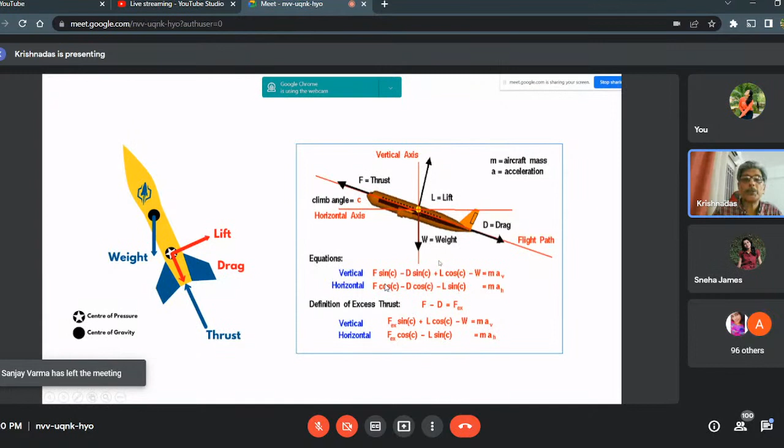You can forget about the discussion about the equations, what is lift here. You can forget about that.

Now, as far as a free body is concerned, it has got things like this - a center of gravity, and about the center of gravity, the vehicle is rotating. And when the vehicle is rotating, it has got a lateral acceleration which is generating a rectangular force like this. If it is a uniform body. If it's not uniform, it's not going to be a rectangular distribution - it will be varying to that extent.

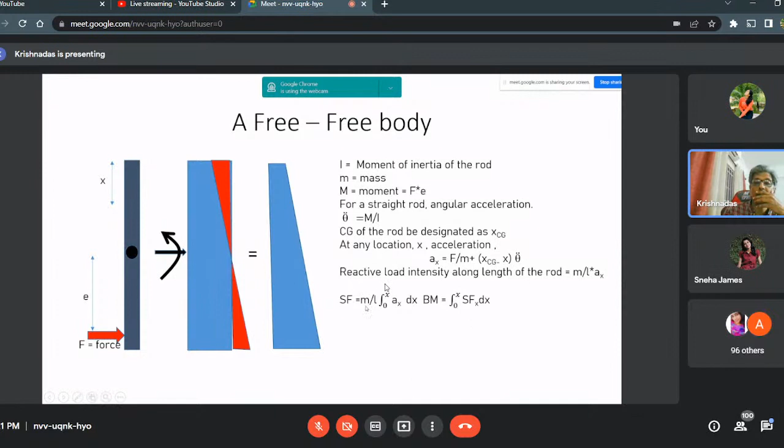And then if it is a rotating body, there will be an angular acceleration which will be giving a tapering acceleration along the length, and accordingly for a uniform body, the lateral force due to the accelerations, both rotational and lateral acceleration, will be a uniformly varying force along the length. This won't be true for a rocket because it is having a non-uniform distribution of mass. And forget about this equation - it is nothing but the integration of the total forces along the length.

Now, the real thing happening for a vehicle is not very simple because it is having a varying geometry as well as varying mass. Accordingly, the forces, both aerodynamic and inertial forces, will be varying, and accordingly the bending moment distribution will be something like this, and shear force distribution will be something similar to this.

One thing I just wanted to tell you is the disturbances due to the aerodynamics will be controlled by a lateral force which is called the control force, so that the vehicle will be kept in equilibrium. See, if there is a lateral force in an unstable vehicle, the vehicle can rotate because of the lateral force and it can break. This kind of breaking has only happened in some of the failed vehicles like ASLV and GSLV. A few of our flights failed because of the lack of control force or no control force condition.

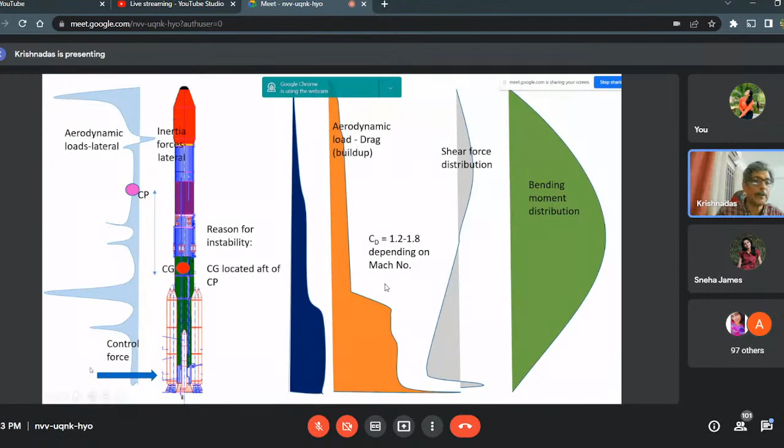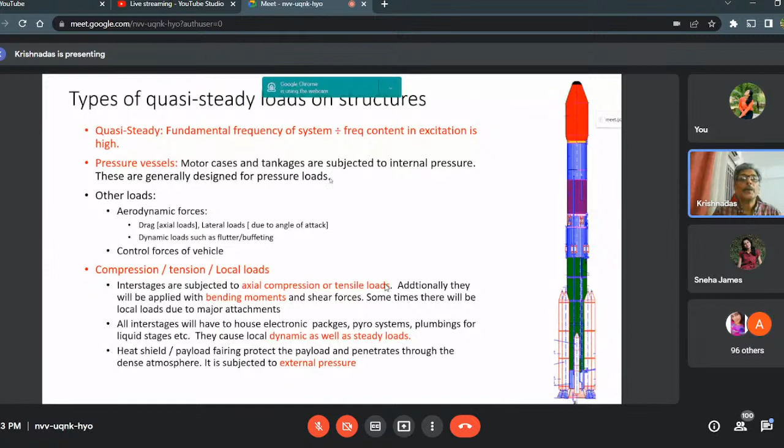So control force is very vital, and this is a life saver for us, control force. Again, this is a problem. Okay. Now, these are the...

Quasi-steady loads - what is quasi-steady? It's the fundamental frequency of the system and the frequency of the excitation. If this ratio is high, it is called quasi-steady. These definitions you will see anywhere. So if the frequency of the system is too high and the excitation is at a very low frequency, you say that the excitation is very steady.

In pressure vessels, motor cases and tankages are subjected to pressure. As I told earlier, compression, tension, and local loads will be happening. These things are very clear. That means when there is acceleration in the forward body, for example, when the thrust is developed by the motor case, the forward body will be subjected to axial compression and the rear body will be in tension along with the pressure inside the chamber.

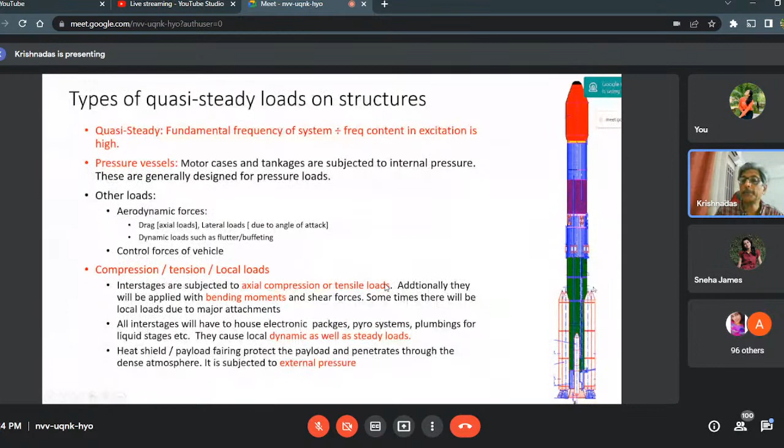Aeroelasticity - you can just note this particular phrase. It's a Collin's triangle. Aerodynamic forces, elastic forces, and inertial forces interact to form the aeroelasticity conditions - static and dynamic aeroelasticity conditions. Then flight mechanics is defined between the aerodynamic and inertial forces, and structural dynamics is defined between the elastic and inertial forces. These details you will see in textbooks. It's very interesting - please note this phrase, Collin's triangle. On the internet, these things will be available.

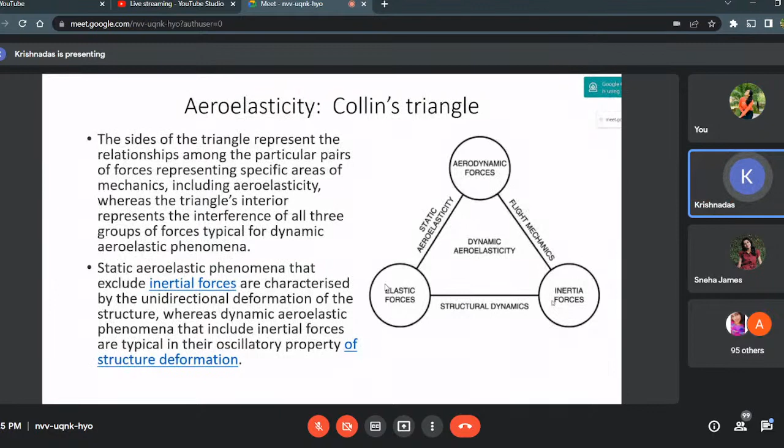So basically, a structure is subjected to these forces. Just go through this diagram. This is very important for later sessions.

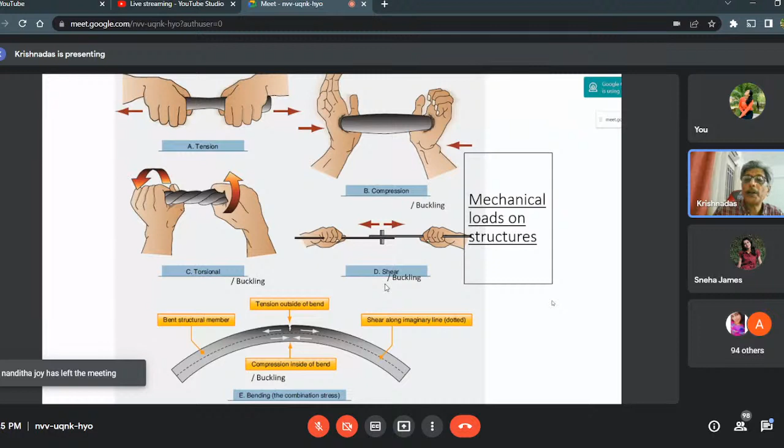Tension, compression, torsion, shear, and flexure - okay, bending, that means flexure. These are the basic forces acting on a structural member.

There are two types of designs in structure - one is strength-based, other one is stiffness-based. Strength means it has to withstand the loads - that is called strength-based design. Stiffness means it has to meet some minimum frequency or minimum buckling margin - these are stiffness-based designs. Fundamentally, pressure vessels are strength-based designs, but there are cases where it has to have some minimum stiffness conditions also.

Stiffness-based designs are something like a spacecraft adapter. Spacecraft should not be subjected to a frequency less than some hertz. In that condition, you have to see that the payload adapter is fairly stiff.

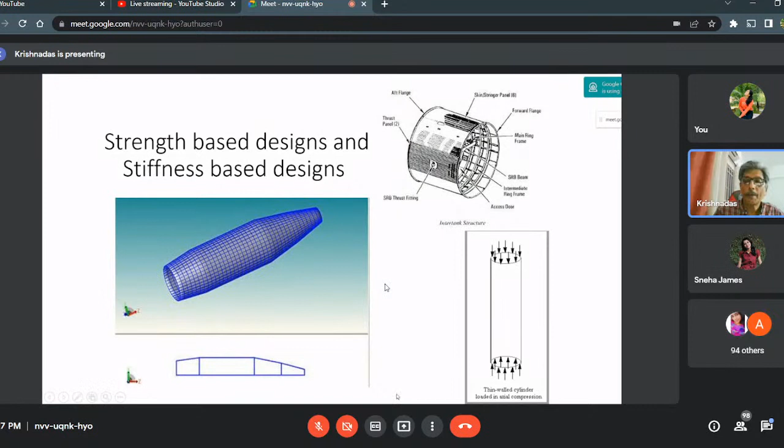These are the material options we have. Can I just go through this? Maraging steel - M250 grade maraging steel, it is called, the first one. It's a very costly steel. It has got a proof strength of 1750 MPa, which is more than 4 times the strength of structural steel that we use in our civil construction.

These two terms, specific strength and specific stiffness, are very important in structural engineering. You will see that among metals, maraging steel is faring the best, 231 with respect to specific strength. Titanium is very close to it - this is an alloy, not pure titanium. 6% aluminum and 4% vanadium are added to titanium to make this alloy. It is also equally good as maraging steel.

Aluminum alloy 2014 is a very versatile alloy we are using. That's also faring good. But you can see that this alloy is 4 to 5 times stronger than normal aluminum. 480 UTS is almost 5 times stronger as compared to pure aluminum.

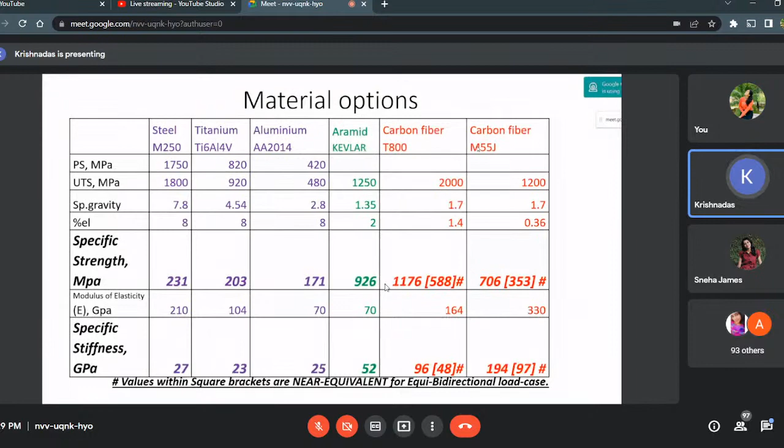But when you come to composite - these three are composite materials - you can see the difference with respect to specific strength and stiffness. They are faring much better than metals. So composites are very good proposals for large vehicles. This is again another way of telling about the advantage of these materials.

Just an exploded view of a typical launcher.

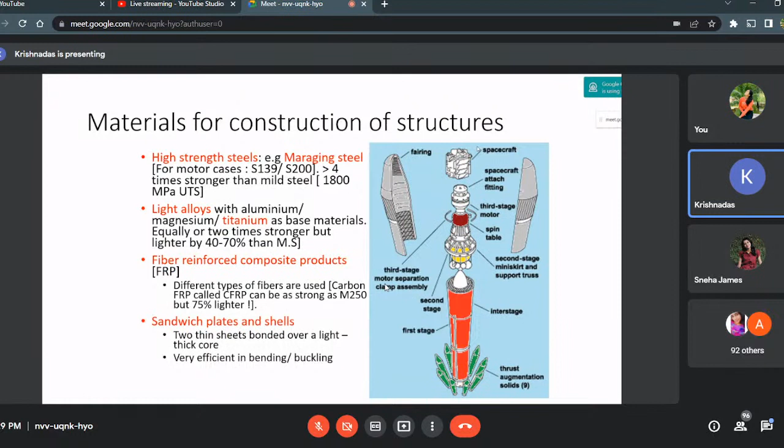Now this stress strain curve of a metal is something like this. This phrase also you please note down, Ramberg-Osgood relation. The shape of this particular stress strain curve is defined with this equation.

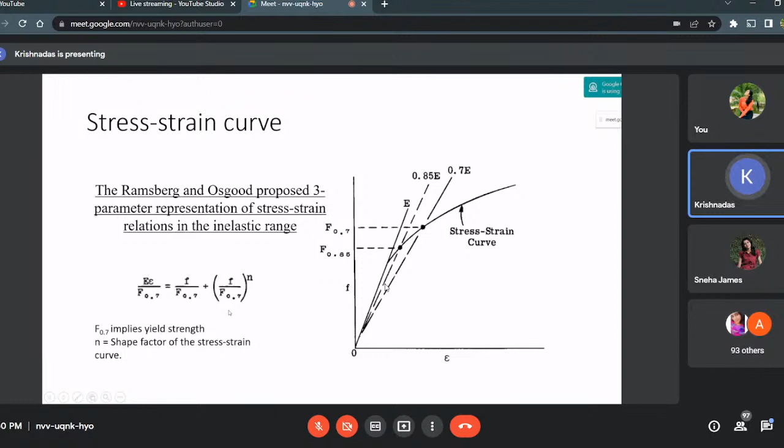So F.7 implies the yield strength of a material - it's a proof strength, we call it. It's the secant lines at 85% of E and 70% of E, the Young's modulus, where they cut the real stress strain curve. These points are defining the F.7 and F.85. With this, the Ramberg-Osgood relation is worked out in this fashion. So N is the shape factor for this curve.

So this is the construction of such a structure.

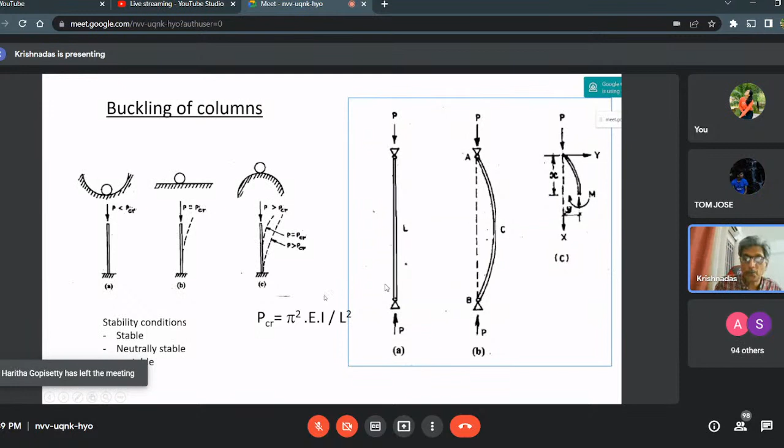Now what is buckling? This you have already learned in your BTech earlier semesters. Buckling is an instability. Depending on the end conditions, the critical factor will vary. Actually, pi squared EI by L square is for a both sides hinged construction, but a K factor will come depending on the end condition. K will be 0.25 for a cantilever, and if both sides are fixed, it will be 4, something like that. So there is a condition.

As far as a flat plate is concerned, it's like this. If only 2 sides are supported, it will buckle something like this. But when 3 sides are supported, the buckling mode will be something like this, because these 2 sides cannot buckle. They are simply supported, so they will not buckle. The free end will buckle. So the Kc value will vary accordingly.

This formula is very similar to the formula for a beam. Only difference is that 1 minus nu square term is coming because of the width of the plate. So the Poisson effect is coming here. And T by B, the whole square divided by 12, is nothing but that L by rho condition, or rho by L condition, I would say.

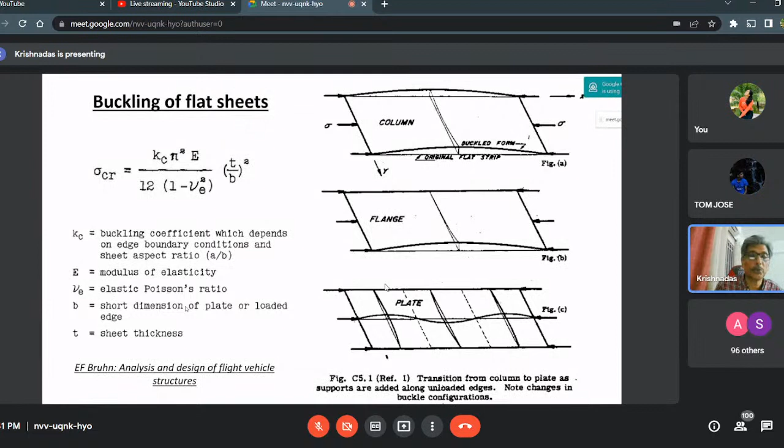And these factors, please go through this E.F. Bruhn, Analysis and Design of Flight Vehicle Structures. Please note down this, it's a very important book. If somebody is interested, please refer this. Very informative, a book which was written long back, around the 1960s. But it is still fundamental even now, because fundamentals of our science don't change, starting from Newton's period. So E.F. Bruhn, Analysis and Design of Flight Vehicle Structures, is very important. Please note down this particular reference. It is available on the internet.

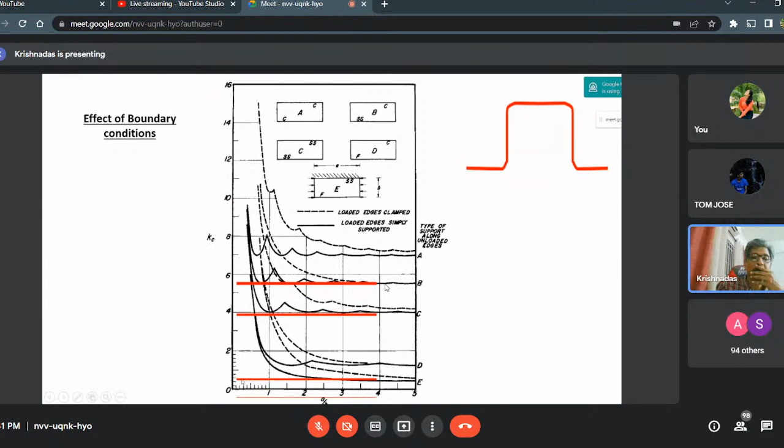And different end conditions of this particular plate are clear here. You will see that depending on the end condition, there are different values for Kc. Very, very low values, like 0.5 or 0.4, to 5.5 are coming. So the end conditions are very important.

This is a condition where a hat section is buckling, different parts of the hat section buckling. For example, this is a crown, you can consider this as a simply supported condition here. It will buckle like this. This will buckle like this. And after the rivet, you will see a free portion. It will buckle like a one-end-free condition, like what we have seen previously. So this is the condition of a free edge beyond the rivet.

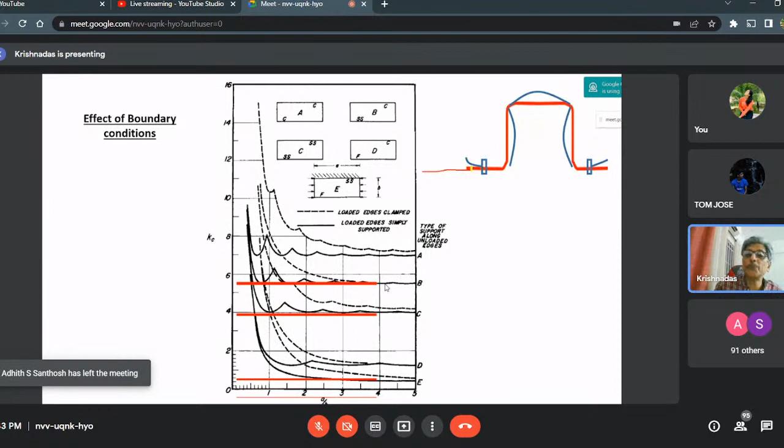So you can appreciate that when the rivet distance is far off, for example, if I'm giving a flange which is much longer than this, you can see it has no meaning. When you really see that, the flange doesn't serve any purpose, it will simply buckle within. So this is the condition where we are having a very limited length of this flange.

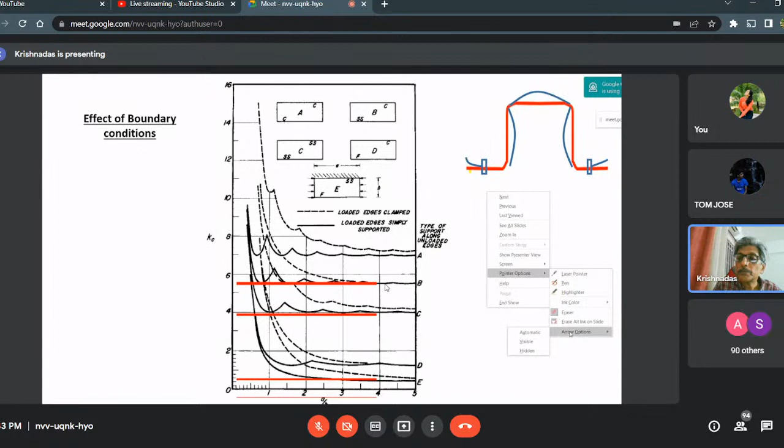Now, when we come to the next one, this is buckling under shear. So you see that the pattern is something like a parallelogram. It is going into a parallelogram or a rhombus condition.

And here, when we go for buckling under bending, how does bending cause buckling? You know that beyond the neutral plane, there is a compressive region. In that region alone it buckles. So when we have a very long web, for example in an I-section, the web is very long, it is likely to buckle even under very low stress. This is a dangerous condition for an I-section. Even though we say the I-section is very good in taking bending, the web also has to have good strength and stiffness. Otherwise, the I-section will fail because of the buckling of the web under bending.

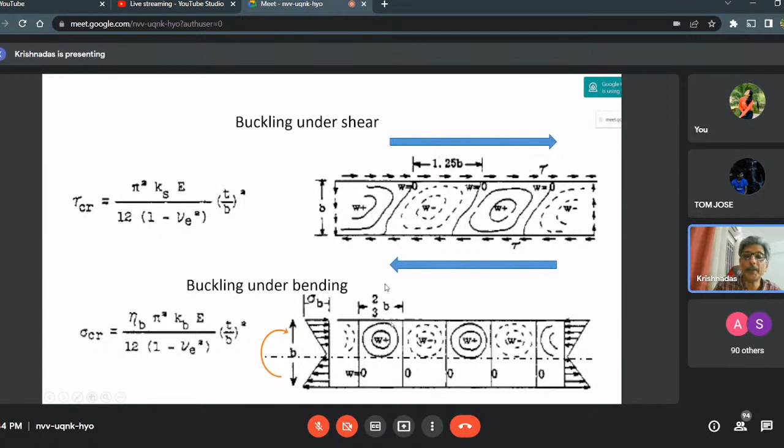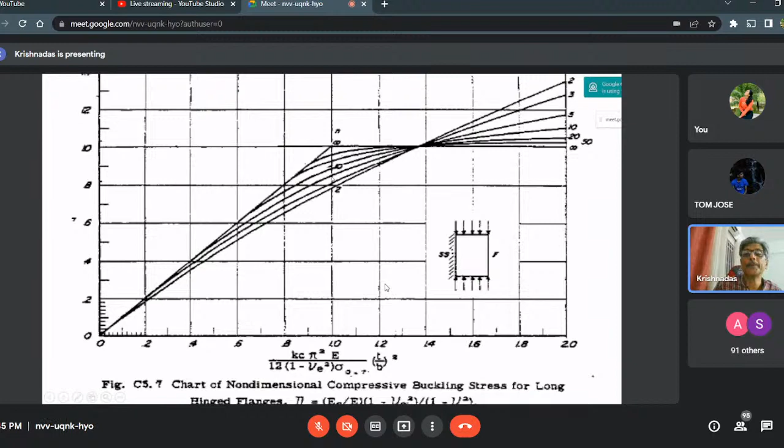Now here I am depicting a cross section where it is riveted. The shell is riveted to the end ring, and you are having a bending and shear force distribution. Around this end ring, there are regions where this bending is going to cause compression here and tension here. How that compression and tension really pass through this end ring is an interesting aspect. Where the compression is there, the compression is going to happen by butting these two flanges together. When the joint is in a region subjected to tension, for example this area, it is subjected to tension, the joint will open there.

What happens because of joint opening? The flanges will not be butting, so a portion of the load will go through the flange compression area. Even though the cylinder is uniform, the behavior of the joint is different at different orientations. Compression is passing close to the hub, whereas tension is happening with an eccentricity from the hub. These kinds of finer aspects we have to see.

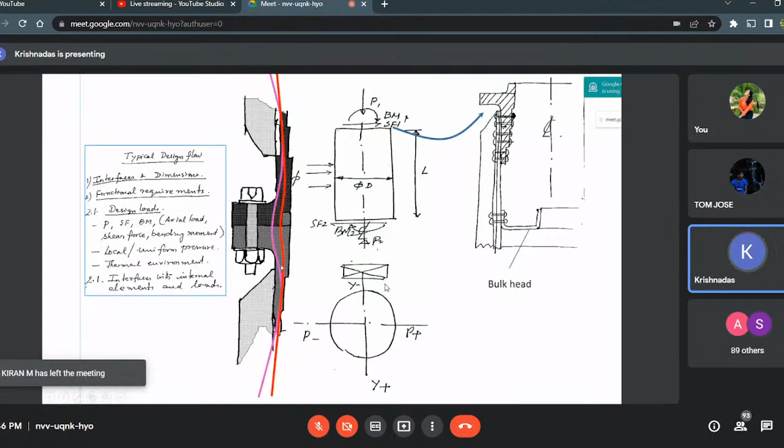Okay, leave all these points. I'm just telling about the hat section. A hat section has different members: crown, two webs and two flanges. The flanges are riveted, and there's a free edge region.

These aspects can be designed by varying W1, W2, W3, etc., to see that the hat section is properly designed. For example, if I make this W2 too high, you know it is going to buckle there, so you cannot make it too high. The thickness of the hat section is important, and the height H is important.

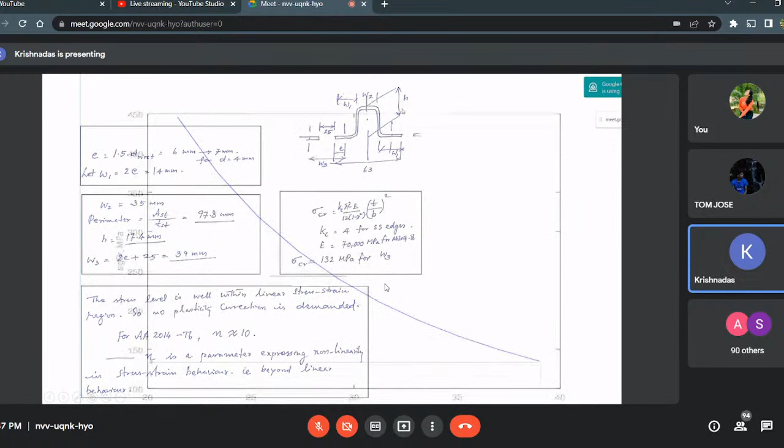So this basically tells what happens when the width W is increasing. Exponentially, the strength is going to come down, because that T by B, the whole square, whatever we have seen earlier, is making the section weak when the width is increasing.

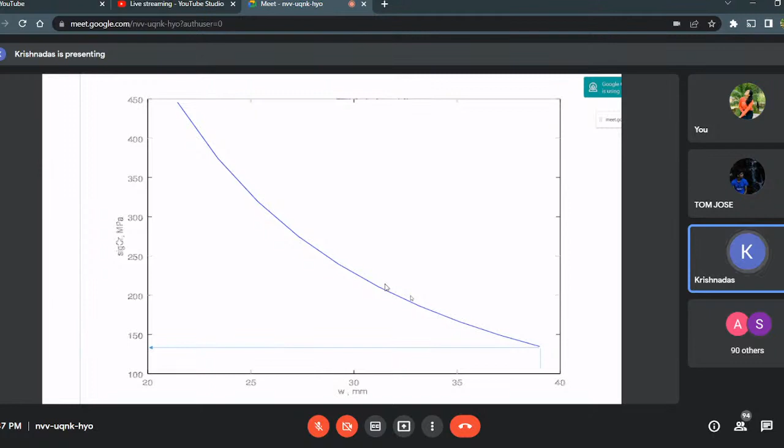Cladding correction for aluminum alloy. Cladding is given to see that the surface is protected, because pure aluminum is good in resisting environmental attacks. So cladding is given.

But what is the effect of this cladding? The overall thickness of the sheet, which is used to form the hat section, becomes structurally weak because of the cladding, because cladding will yield faster than the core. Accordingly, there will be a small weakening of the section to the extent of the cladding thickness.

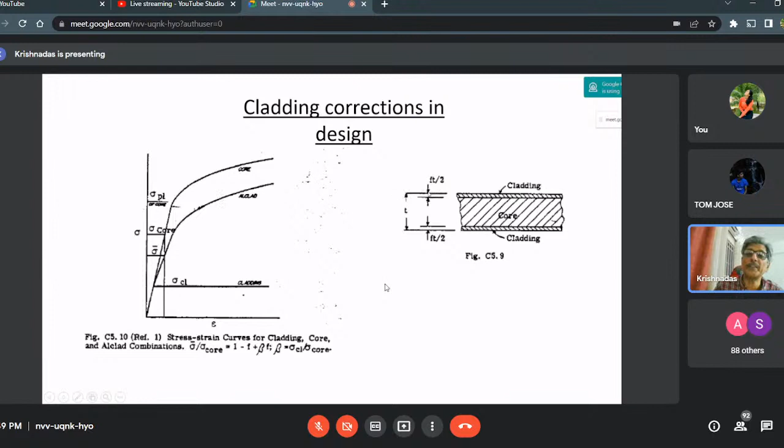There should be enough thickness. So when you build the thickness, you have to see what the cladding is there, and the thickness of cladding should be good enough for environmental resistance. But it should not make the section so weak also.

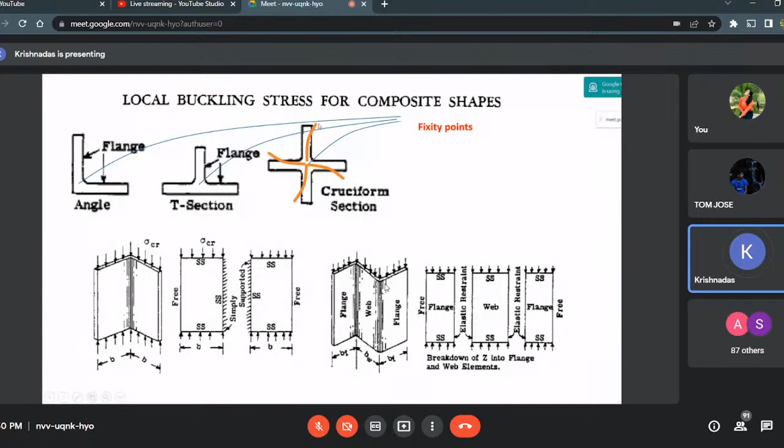So fixity points - these are all called fixity points. For example, in a cruciform, this is a fixity point. About that, it will start making the buckling mode shapes.

Again, these are all different sections. This hat section I have already told you. This is something like a Z section. This G section, etc., please see that particular Bruhn book - there all these things will be described.

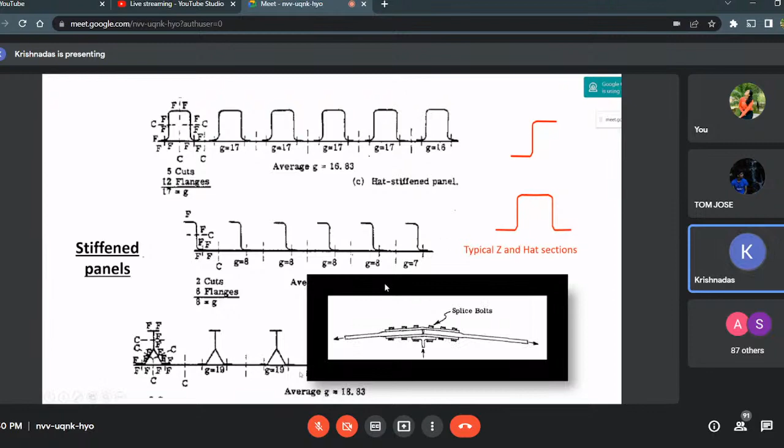Between two shells, there will be a double splicer along with a T section between them. This is the way a shell is buckling. So between bulkheads, it will start forming this kind of mode shapes.

I told you earlier, it is not a simply loaded condition, and in tension it will not have buckling, because tension is usually not an unstable condition. Stability condition doesn't normally arise on a tension member, but on a compression member it becomes unstable.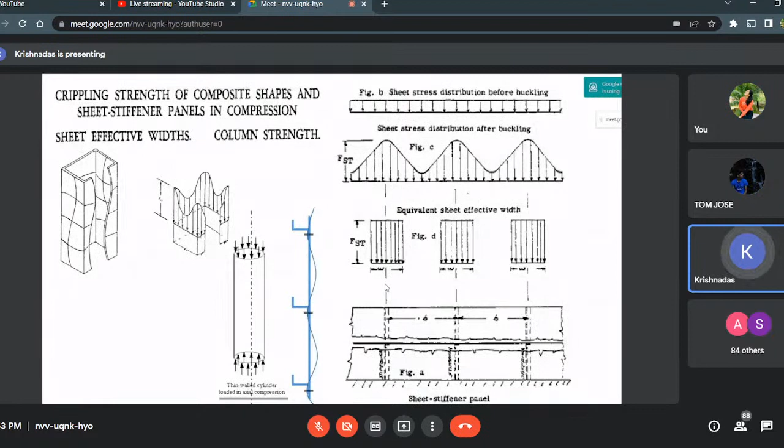So really, when you see the development of this particular section, it will be something like this, where you have the area where the corners are. That corner, as I told earlier, is a fixity point, and it will take much more compressive stress than locations away from the corner. That is very important, so we always have to have corrugations - you should have this kind of shape with rectangular bends onto the stiffeners.

Beyond a certain line, you see an effect of the yielding or strength conditions of the material. For example, take maraging steel and mild steel, having almost similar Young's modulus E value and Poisson's ratio. In such a condition, which one will buckle first? Under the Euler curve, you'll see it has no relation with respect to strength. It only depends on the E value and geometric values like L dash and rho. So an Euler beam of maraging steel and mild steel will buckle at the same load, theoretically.

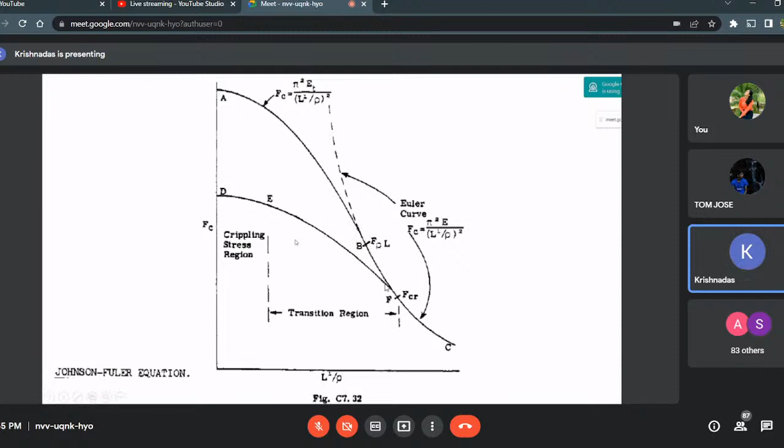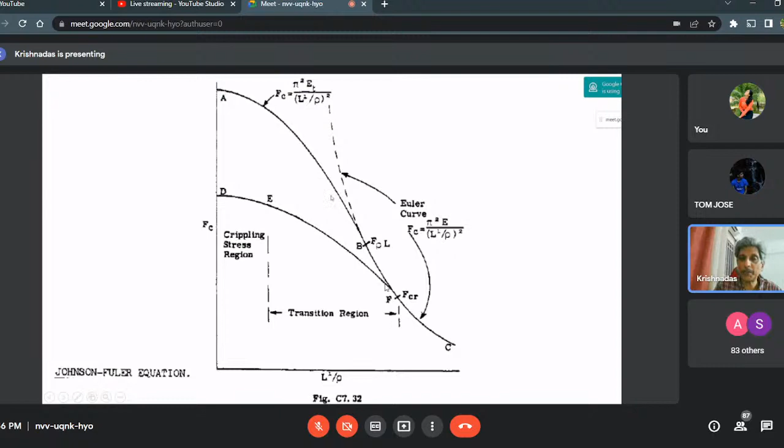There is an intermediate region between compressive failure and buckling failure, described by the Johnson-Euler equation. This covers conditions like FC and crippling, which occur when the failure stress is much more than, or closer to, the compressive strength of the material. You also have to redefine failure in this region, which moves away from the normal condition of the Euler curve. These are the different conditions of Johnson-Euler curves.

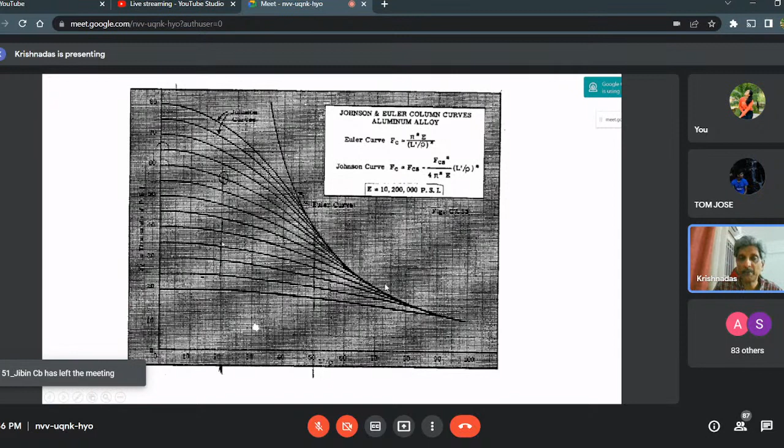This is also available in E.F. Bruhn's book. And non-uniform stiffening is what I was telling about. I'm sorry, I think I'm running out of time. It's already becoming 8, I'll go fast.

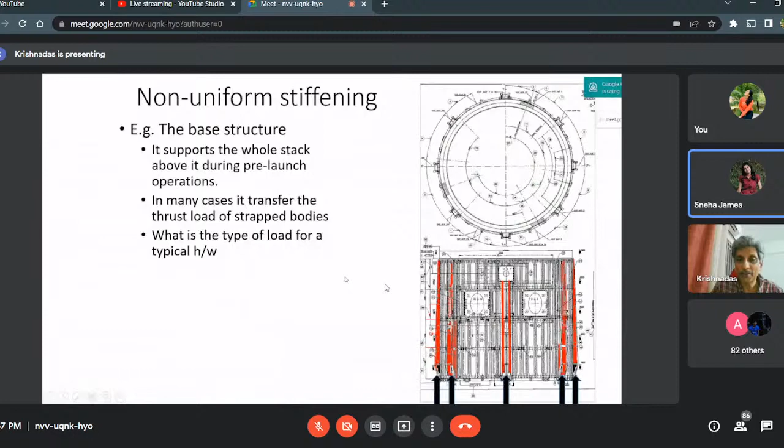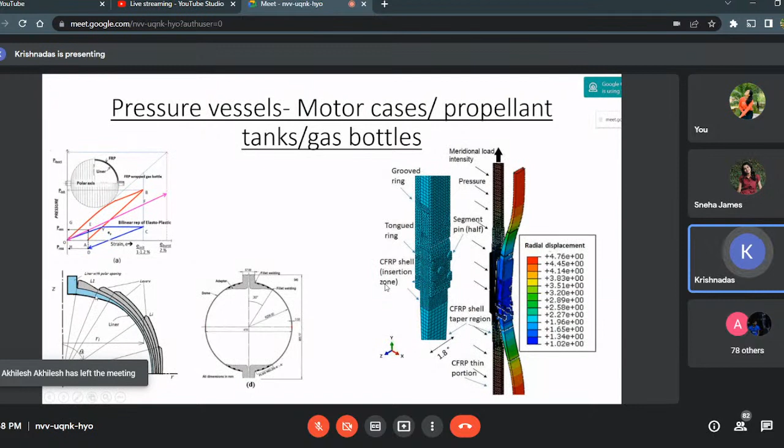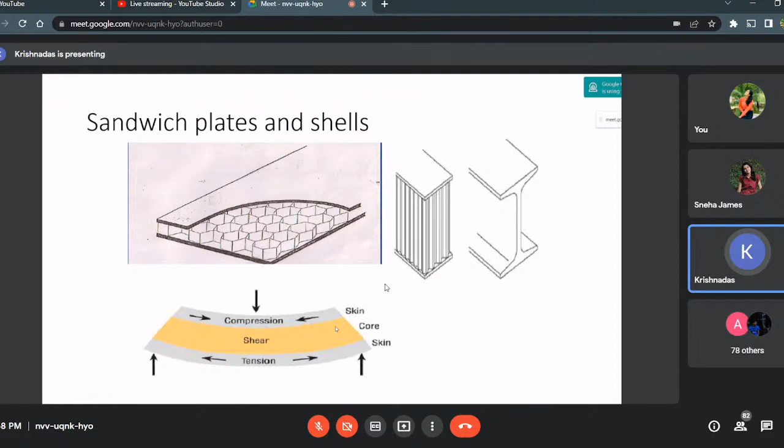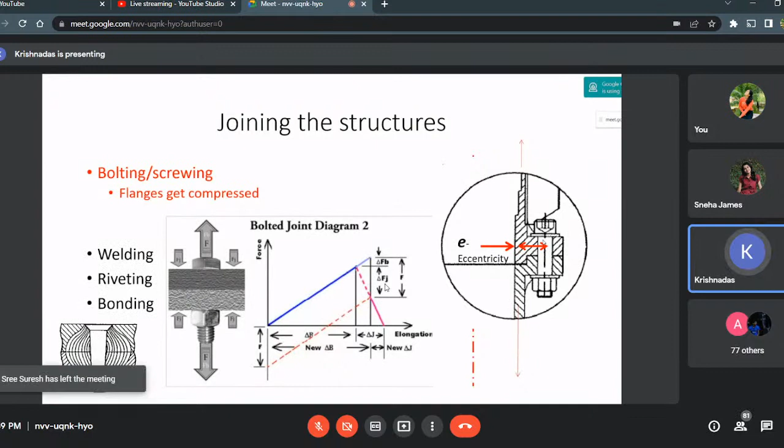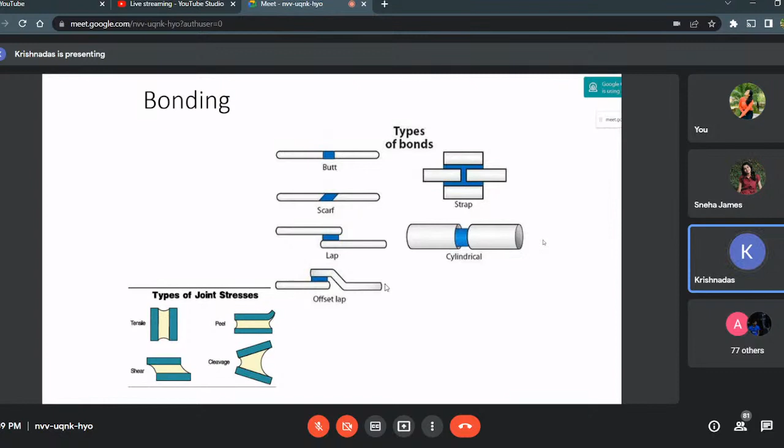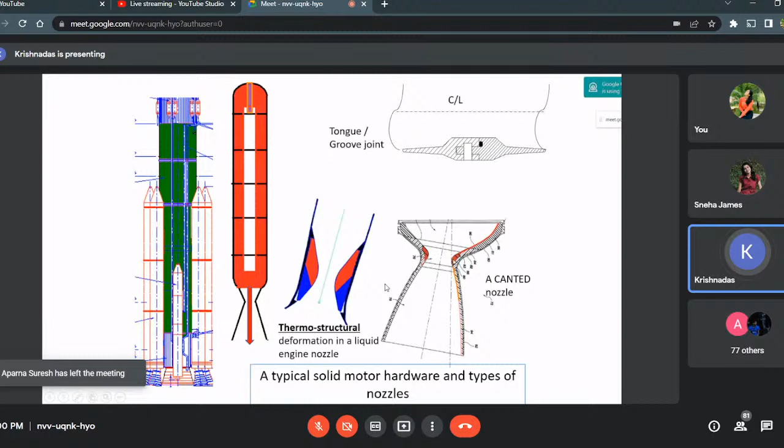Okay, these are welding, riveting, and bonding - different ways of joining different parts of a structure. Here is a segmented joint of a pressure vessel; pressure vessels are made in sections, and how you join them is very important, with certain principles defining the joint. When you have thermal contractions of the liners for a nozzle, these are subjected to very high temperatures, something like 3000 Kelvin. The temperature diffuses into the backup, so there should be a refractory or thermal protection system for the metals, because metal cannot withstand more than about 150 or 200 degrees centigrade.

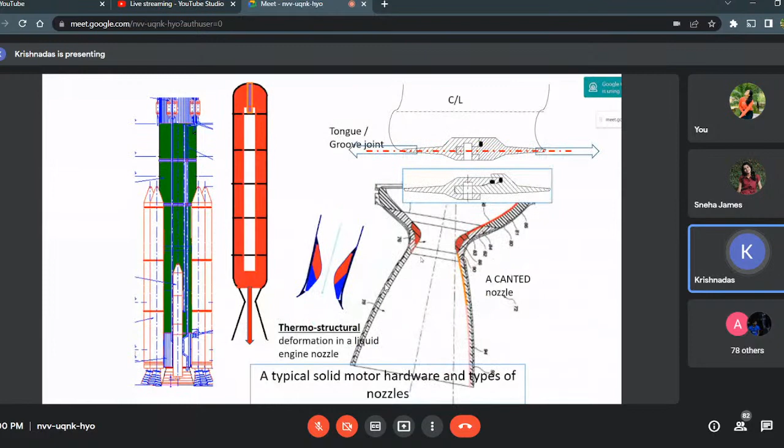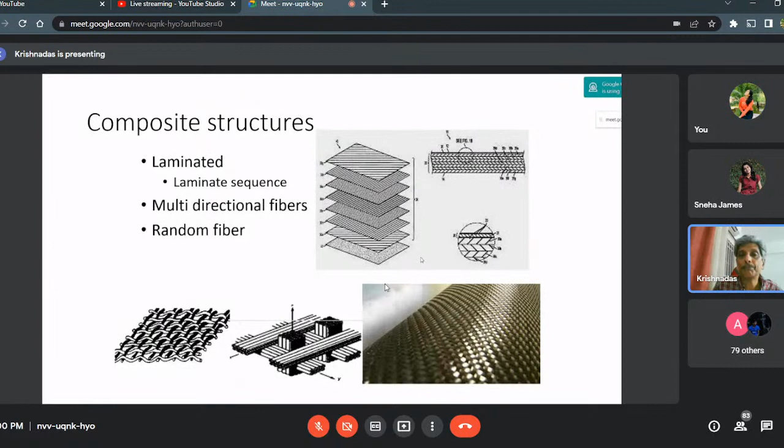Okay, I'll leave these kinds of explanations. These are all composite structures, or laminates, having different fiber orientations. You would have studied it. If you want details, I will come back in your question and answer session, or you can refer to the book Composite Structures by Johnson, which gives many details about composite structures.

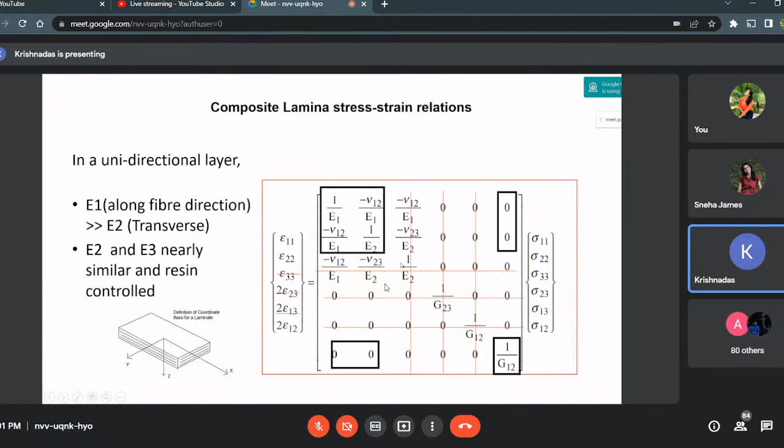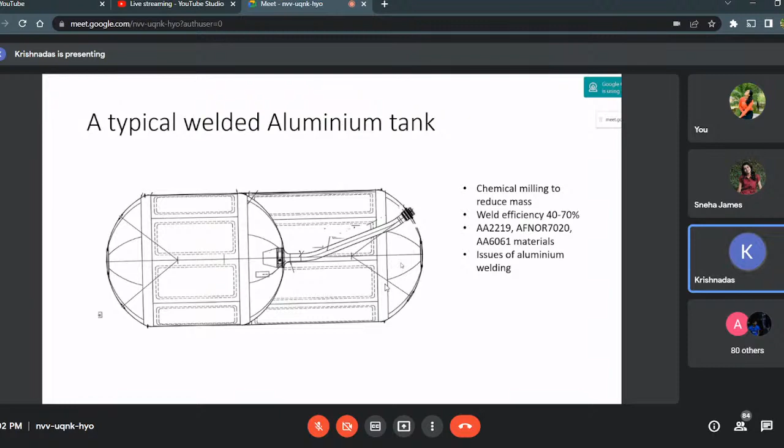Rocket structures normally have around 4 to 5% metallic mass, and another 4 to 5% thermal mass. So overall mass of a cryogenic tank may be somewhere around 10% inert mass. Unless you control that within some 10%, there will be a penalty for the launcher with respect to payload capability. Now this is a rocket structure.

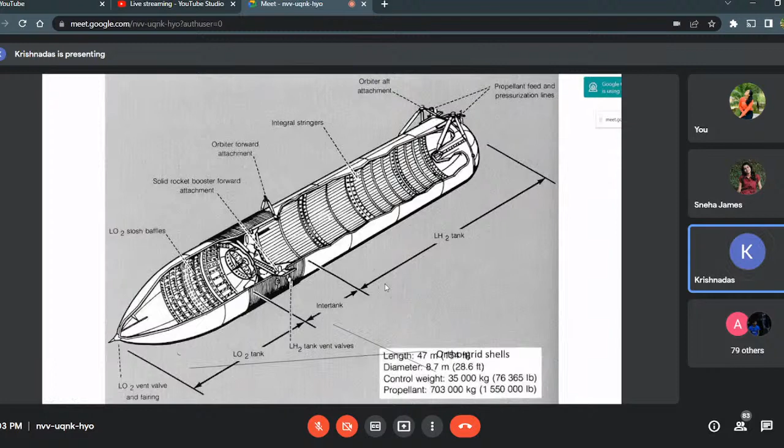Again, like our fuselage, it has bidirectional stiffeners. This is a fuel tank having a composite overwrap over a polyimide liner inside. So the overall mass of this tank may be... the mass may be the combined mass of these two boys who are doing this work. It may be only something like 200 kg.

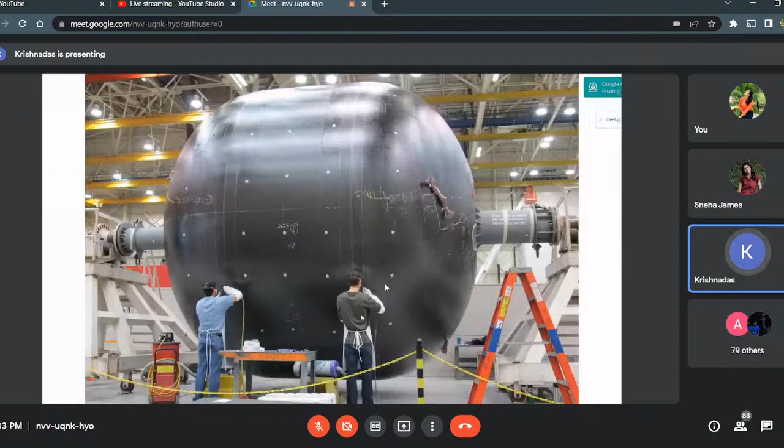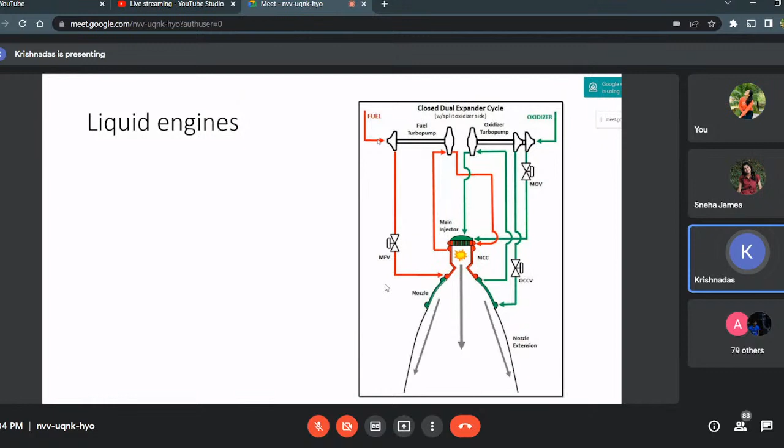Okay, this is a liquid engine, which I have not described about. There are complexities with respect to this. The turbine and pump of cryogenic engines work at around 44,000 or 45,000 RPM, whereas liquid engines work at around 6,000 RPM. For example, our second stage of PSLV, the horsepower of that particular turbo pump is nearly 2,500 HP, whereas the mass of that is maybe nearly 100 kg only. So 100 kg of engine is developing around 2,500 HP.

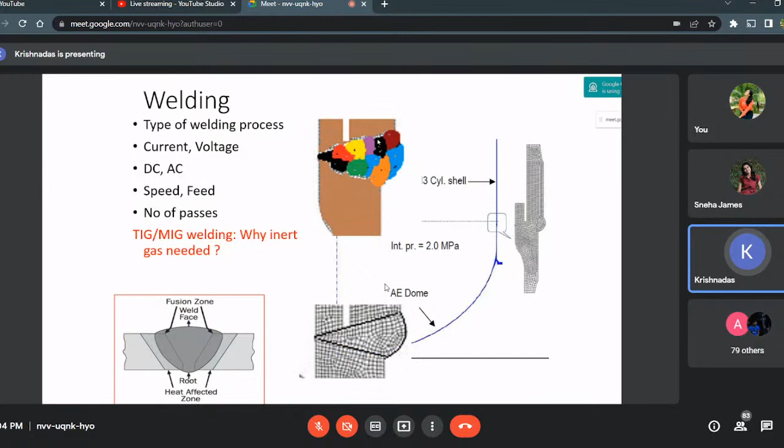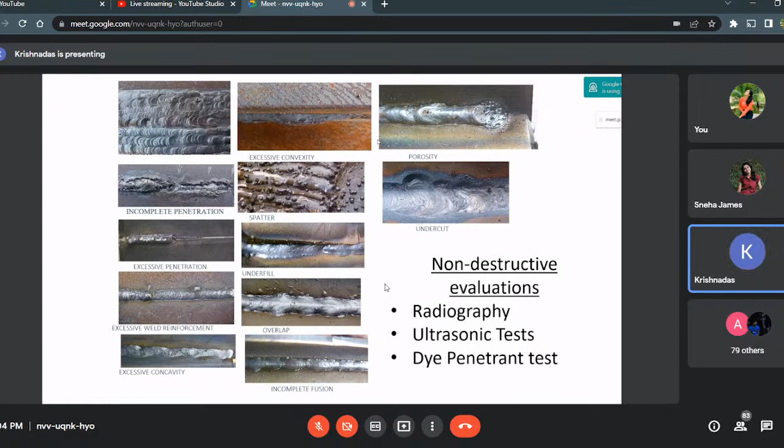This is welding. Welding has got a lot of versatility. That's a very important technique as far as our tankages and motor cases are concerned. Welding defects are very critical. We have to have non-destructive evaluations to qualify these welds.

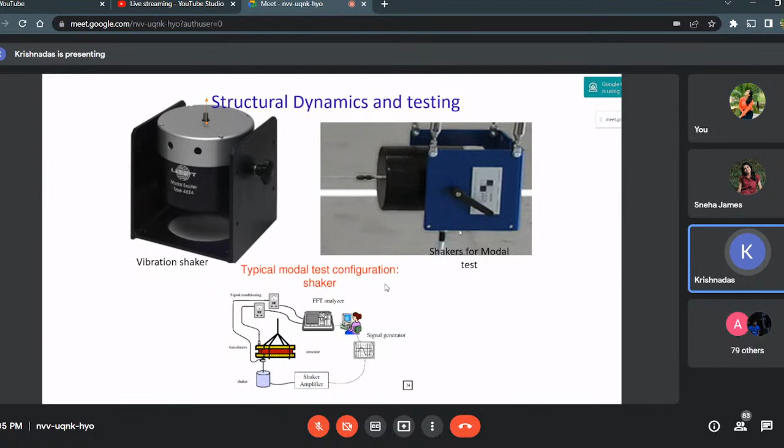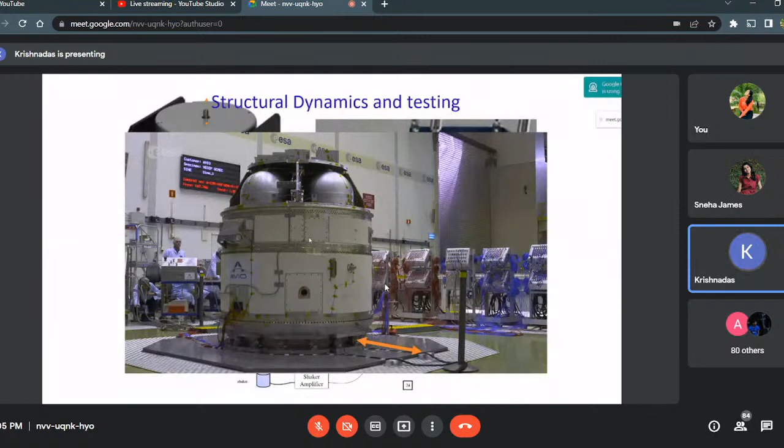Structural dynamics is a very important area as far as structural engineering is concerned. We have structural dynamic testing equipment. This is a vibration shaker for a stage, and the stage is undergoing vibration in this direction. This is called a slip table. The shaker goes from 20 Hertz to 2000 Hertz to see that different parts are vibrated, and if there is vibration loosening, that also will be addressed by this testing.

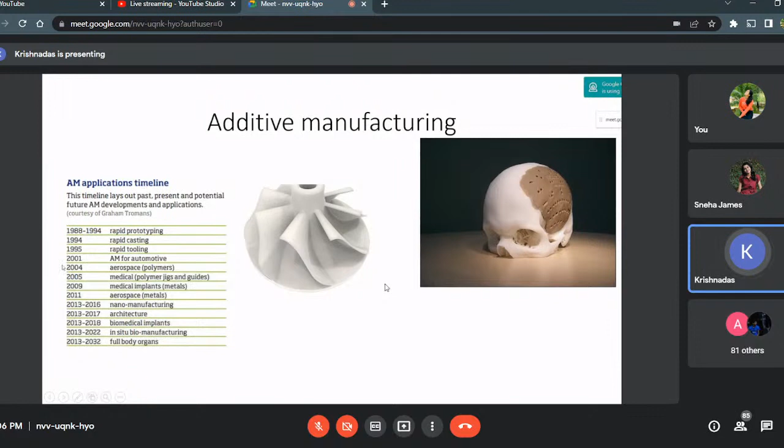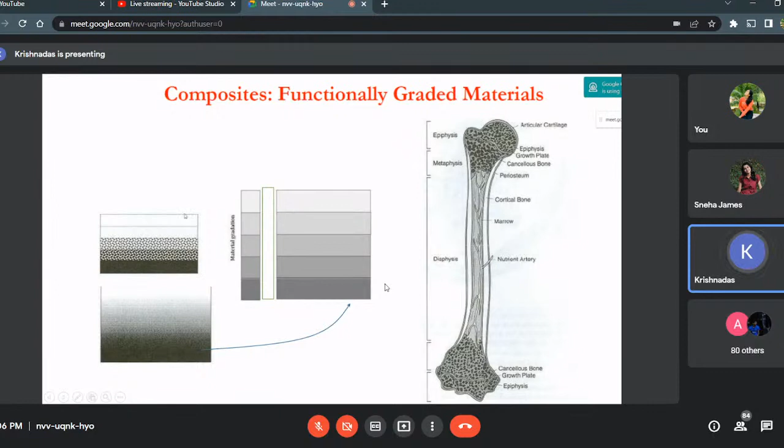I'll see it later. And the composites, there is a graded composite. It's a generic condition. The natural trend is something like this, a very uniformly graded thing is there in our bones, whereas we are trying to imitate it in discretely graded conditions. And quasi-static loads and vibratory loads, these are all important.

You have to understand how a single degree of freedom system sustains and how it is to be designed. What is the critical condition of resonance, how to avoid it, and how beyond a particular level of root 2 times omega by omega n condition, that has to be seen. Then how it is seen that the criticality of this point is avoided after this isolated condition. This is called the isolated condition beyond root 2.

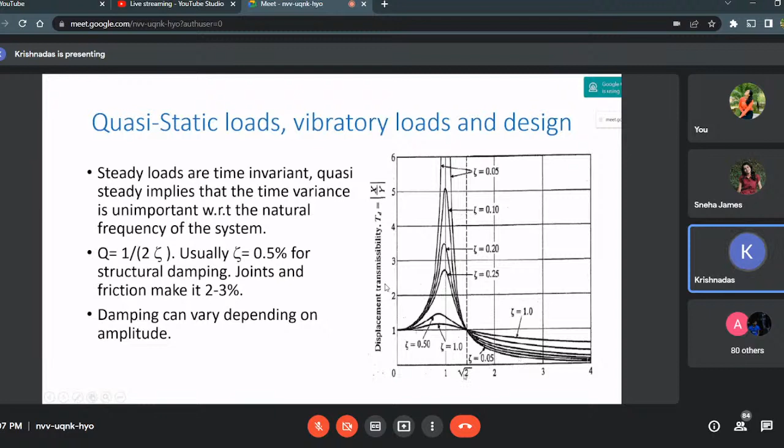This free body diagram, you have already learned in your basic classes. And as far as a beam is concerned, it has got different degrees of freedom. Okay, so thank you, that is the thing.

Just think about why the modal amplitudes of a heavier booster stage are lower. What is the reason for that? And why is the balancing of mass or modal amplitude important in a free body? What is a free body? These things you can get from E.F. Bruhn's first book, Analysis and Design of Flight Vehicle Structures.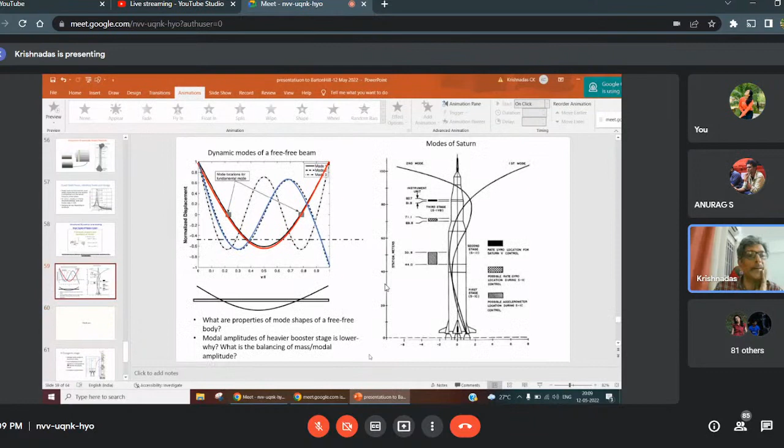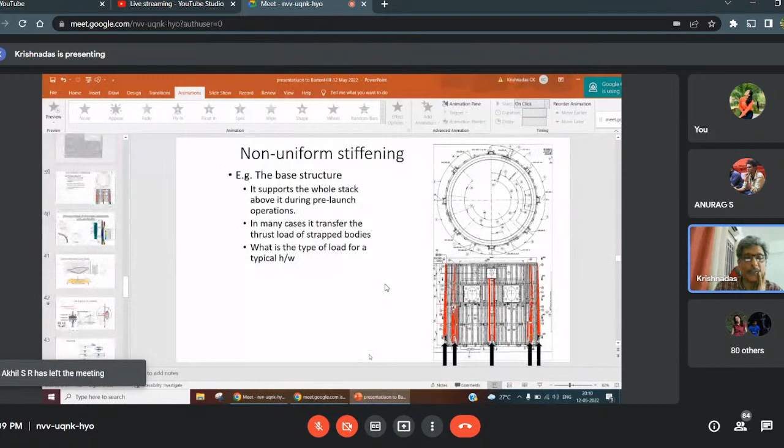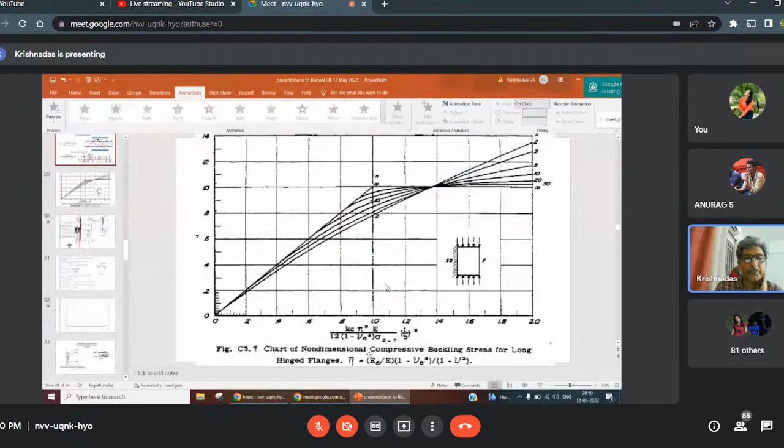Analysis and Design, as I've told, by E.F. Bruhn - he has 2 books, Analysis and Design of Launch Vehicle Structures and Flight Vehicle Structures, you have to refer those. Then Composite Structures by Johnson, please refer that too. This is a very important book - Analysis and Design of Flight Vehicle Structures and Analysis and Design of Missile Structures. These are 2 books by him, he is a very famous man. Based on his book only, our Saturn launcher was designed.

Now, what I wanted to tell you is design is very important, even though finite element analysis is helping us much more to detail about the kind of structural factor etc, we can closely control. But the importance of design and the design approach that E.F. Bruhn has made is very important. And with that background only, we have to go to analysis. Nowadays the analysis tools like...

ANSYS, Abaqus, all those things are there. But if you really see the kind of structural efficiency of Saturn, which was designed in 1965 or later, maybe 65 to 69 - 69 was the launch of Apollo.